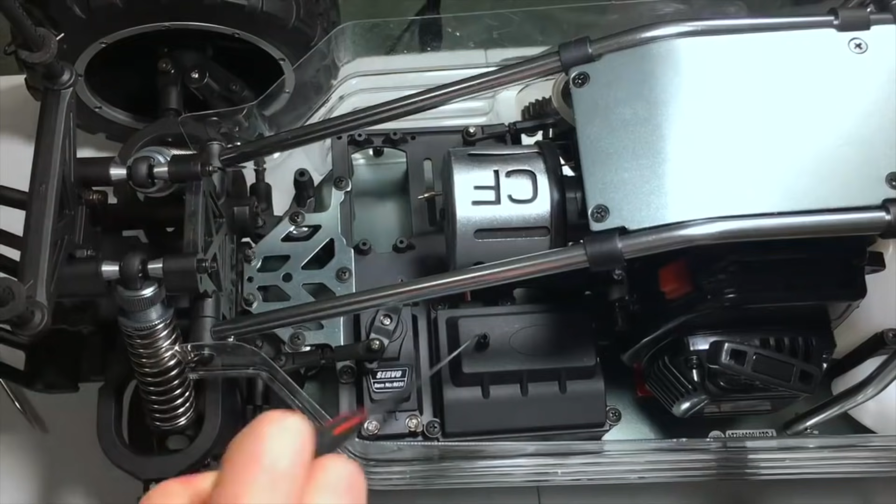Oh, they do fit. Interesting. Wow, so this thing comes with, I think, a 25 kilogram servo, and the brand is Servo. So you definitely know for a fact that you're getting a steering servo. I kind of like that. They're really sure of themselves, this company.

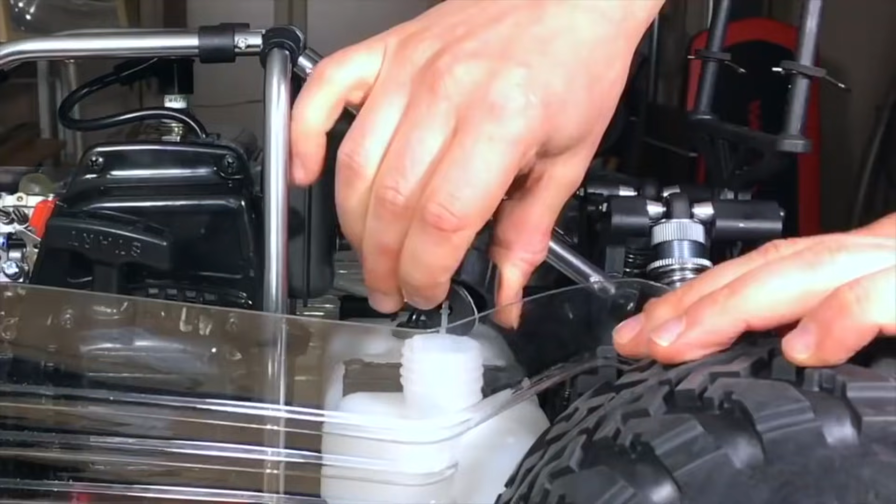It looks like a small piece has already kind of come out. The inside rubber grommet on the fuel cap, it looks like some kind of weird glue is already beginning to come off. You could see that right over here.

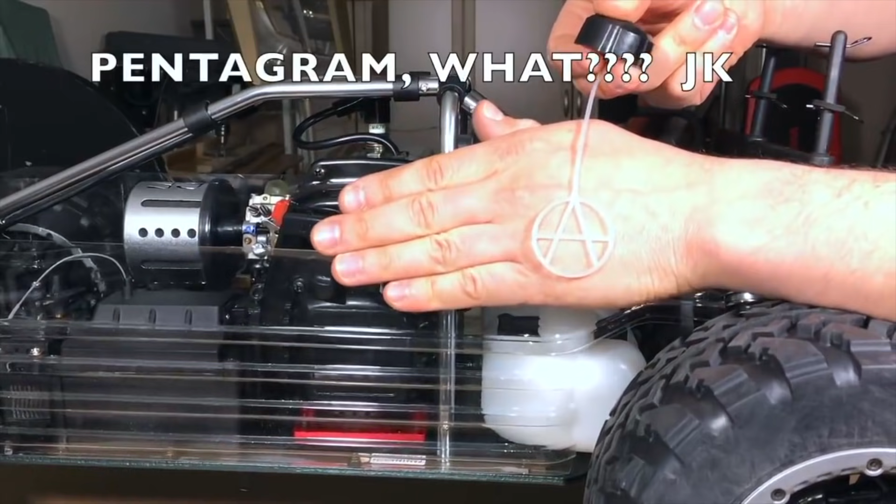So we'll do something about this later. It looks like there's some kind of stopper inside here, kind of like a lawnmower. Oh, here we go, that is weird. It's like a pentacle looking type of thing. I mean, was this thing designed by Satan, or maybe it was designed for Satan?

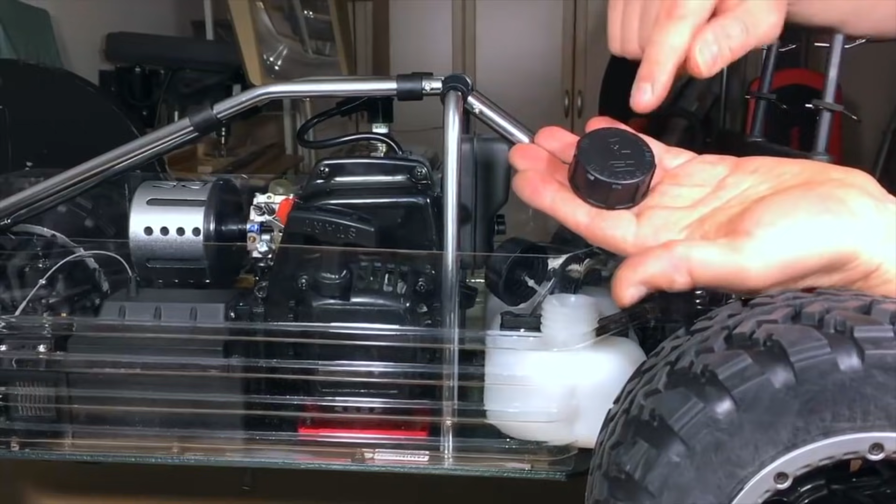I'm not sure, but I do know for a fact that I am not a Satanist. Okay, so here's a non-Satanist fuel cap. This is from my Red Cat. It's the same exact size as the one on a Rovan. Let's see if this actually fits. It looks like it's a much larger fuel cap.

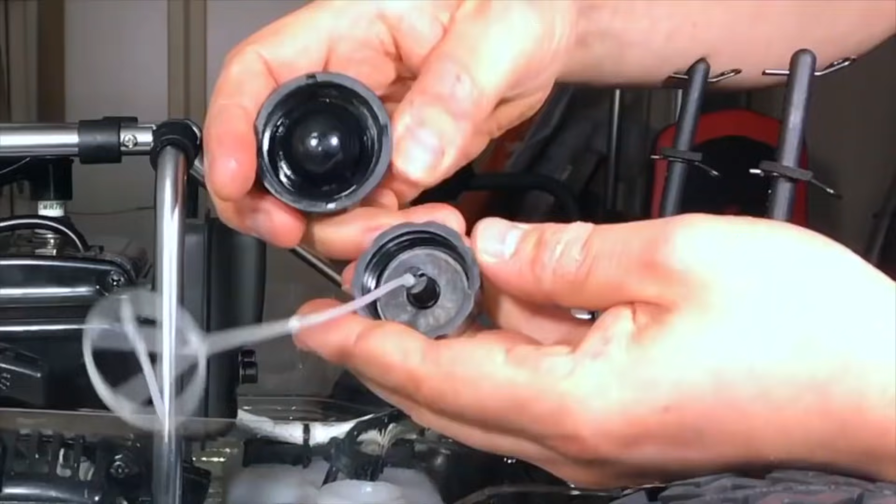Okay, yeah, nothing, it's a completely different size. So the threads here do not fit. That's pretty much a major disappointment. You could tell if you examine them up close. Other than this one belongs to the Church of Satan right over here, right? They're not the same size of fuel cap, so that's a disappointment in itself.

Blah, blah, blah, and then there's some more blah, right? There you go, I read the whole manual.

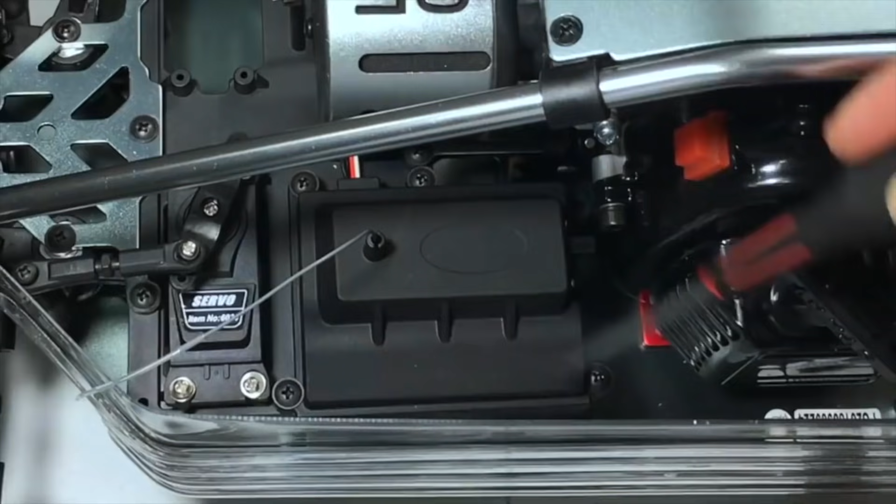Just like the Rampage, this thing has a receiver box that is already pissing me off. Notice all these screws inside here. So every time you want to charge a receiver battery pack, you're going to have to undo all these screws. I mean, honestly, that is very irritating. I don't know why they couldn't have just used the simple Tamiya style charging plug that's available on every single HPI Baja clone.

Another thing, look at this power on off switch. It is literally right by the hot engine. So every time you want to turn this thing on and off, man, look at that, it's right by the motor. Who thought of this design? It's weird, it's as if no one really ever used this receiver box. Why couldn't they have just mounted it here right on the other side? That would have been perfectly logical.

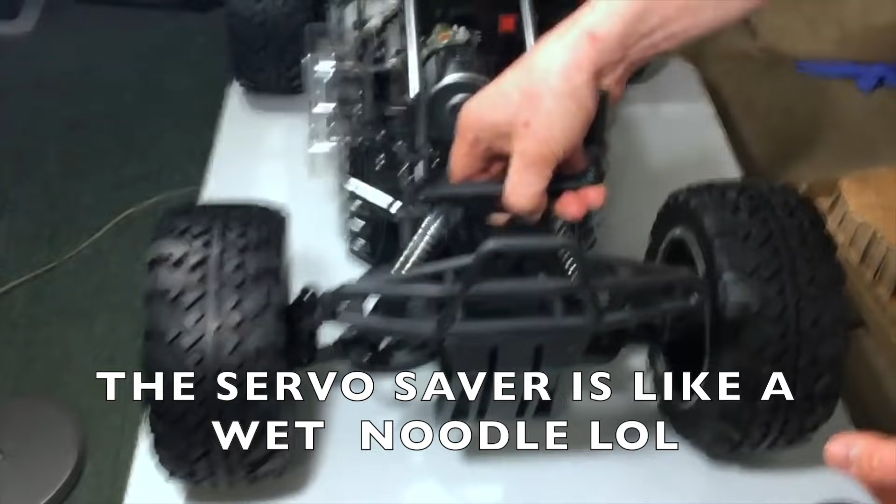Let's check out the servo strength. Oh my God, what the hell is that? That is the worst turning radius I have ever seen in my life.

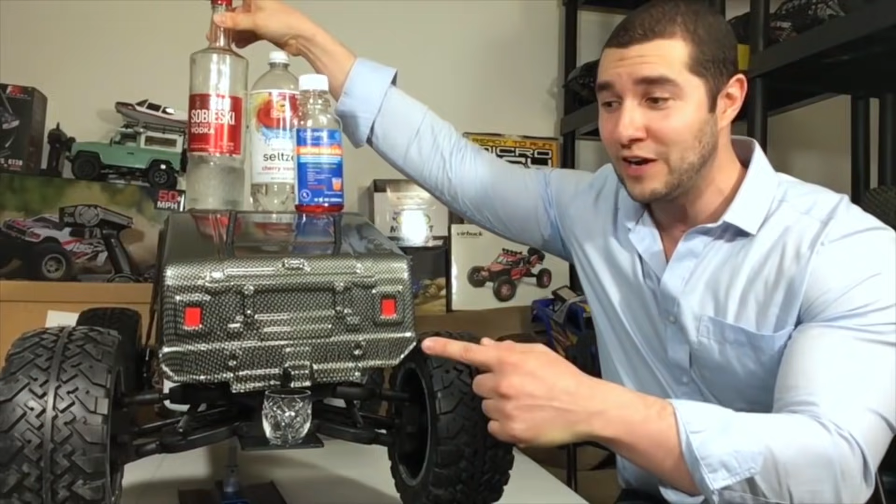Oh man, oh, you could always use your FS Hummer right over here as a bar. What am I going to be doing? I'm actually going to be using this cool ledge here in the back of the chassis. I joked around about this in the unboxing video, just how much it actually protrudes out of the back, that you could in fact stick a shot glass on it. And I'm doing just that.

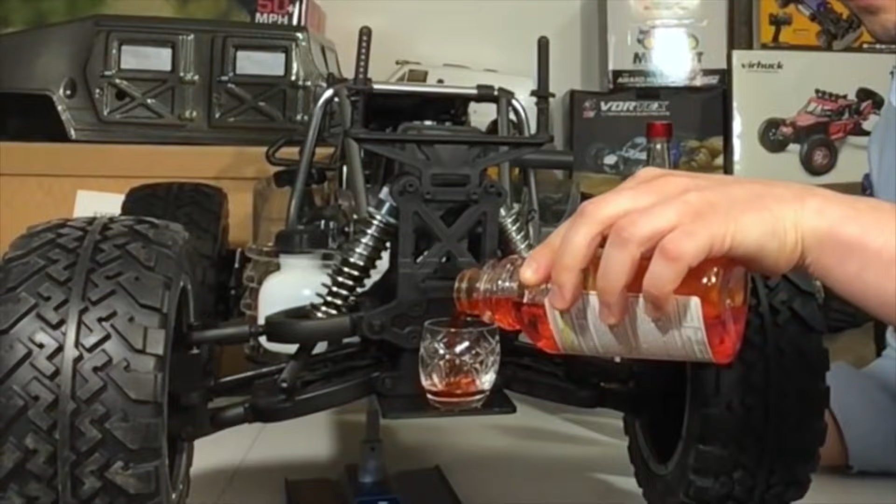Unfortunately, I did come down with a bit of a cold. Okay, the pouring station is prepared. Let's see this happen. Here we go, full serving of some nice cold and flu medication. Look at that, perfect bartender, guys. You don't even have to tip it.

Cold medicine tastes terrible. Let's move on to something better.

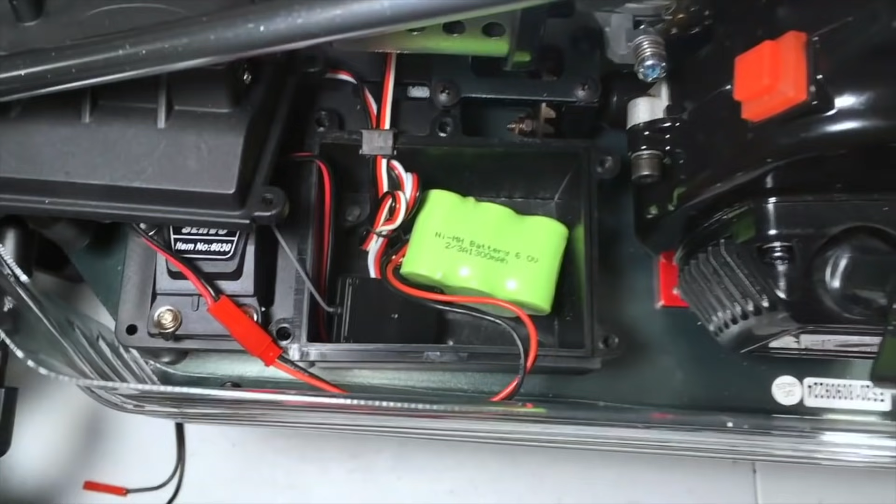Okay, we have the remote on. Let me show you once again how terrible the steering is. The receiver battery is all charged. Look at this guys, this is max steering. Oh my God, oh man, this is the worst I have ever seen. I've never seen such a small underpowered pack in a fifth scale RC.

But you know what, it does the job just fine. Obviously, you just basically got to charge this more. I probably will be putting in a larger 2500 milliamp hour capacity pack from a Red Cat in the future.

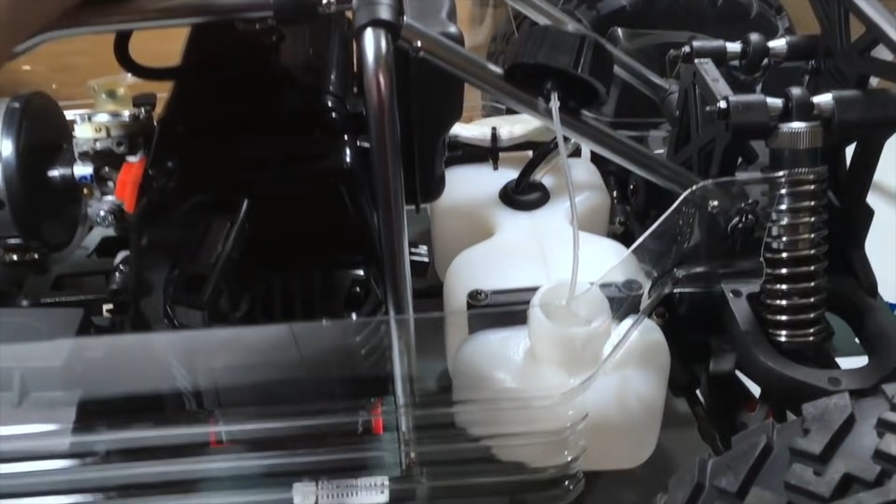Correct something I said about the fuel cap in the last video. Let me just take it out. I just wanted to make sure you guys all know that this is not a Satanist symbol, this is the anarchy symbol. So for all of you guys that corrected me, I'm really happy that you know. I'm not going to ask you how you know, but hey, FS Racing is into the anarchy.

So I wonder what it's going to run like. Hopefully it doesn't give me a nightmare.

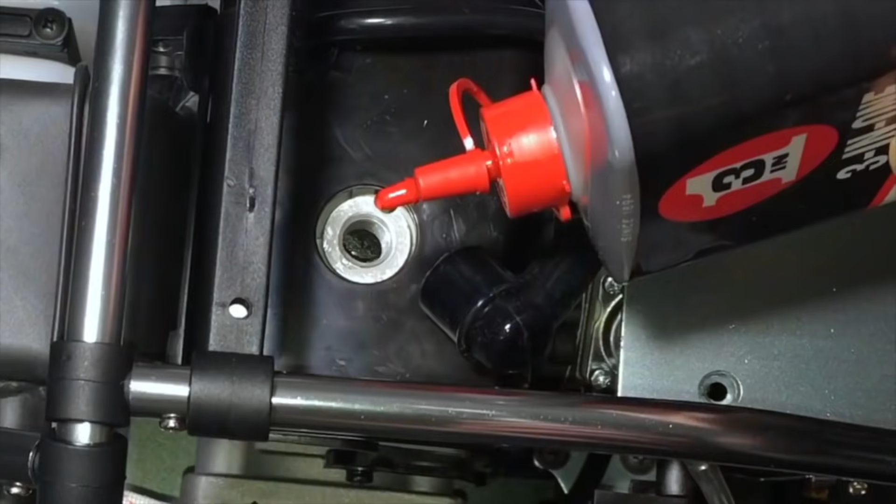Okay, let me spin the pull start a little bit. This is a good opportunity to test for a spark, so let's see if we could see anything coming out of here at the electrode on the bottom.

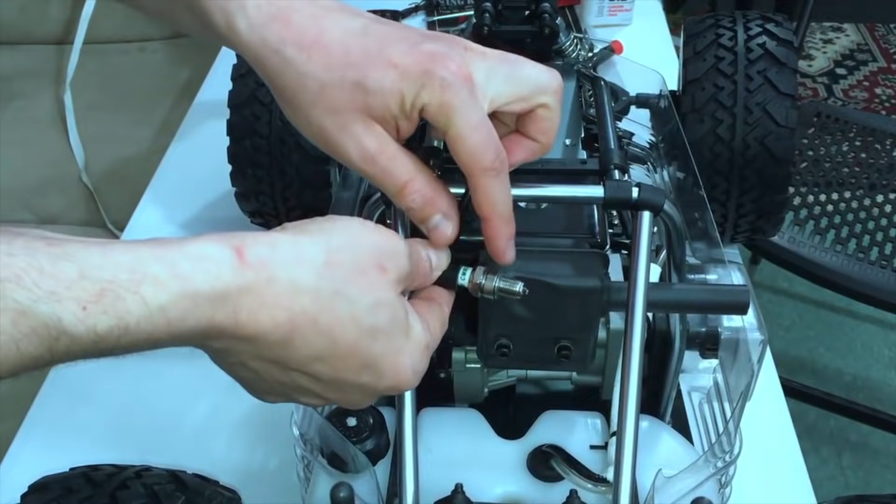Yep, we got spark, guys. I could see it.

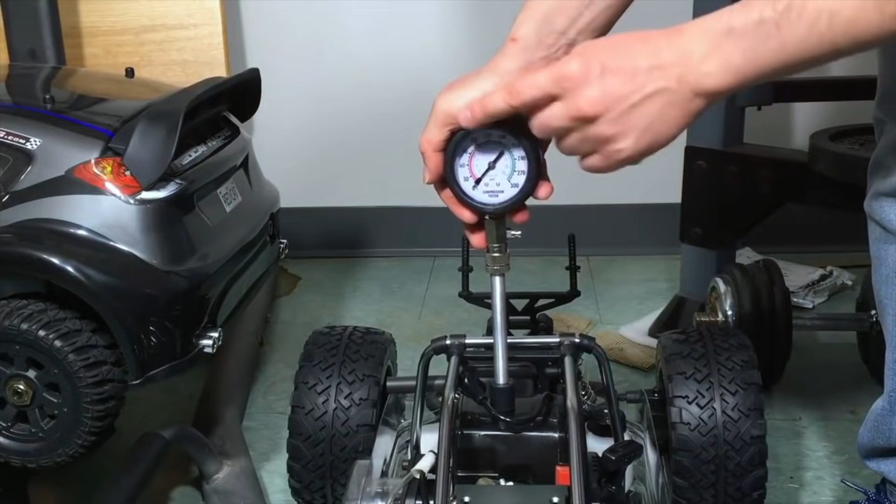Okay, time for a compression test on the Red Cat. I got 120, which is really high. Anything above 100 is good.

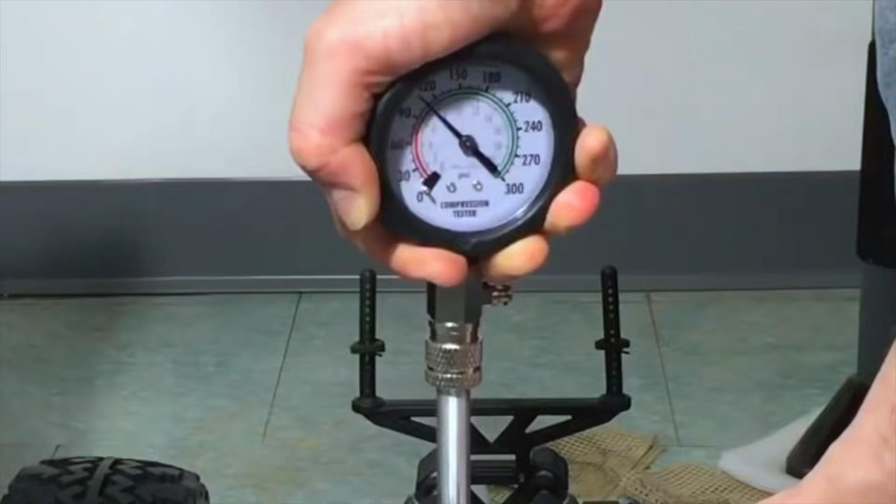Exactly the same, 120 psi. The Red Cat and this one are actually the same. I'm not surprised that the Red Cat and the FS Racing have the same 120 psi compression. In fact, these are probably the same exact motors.

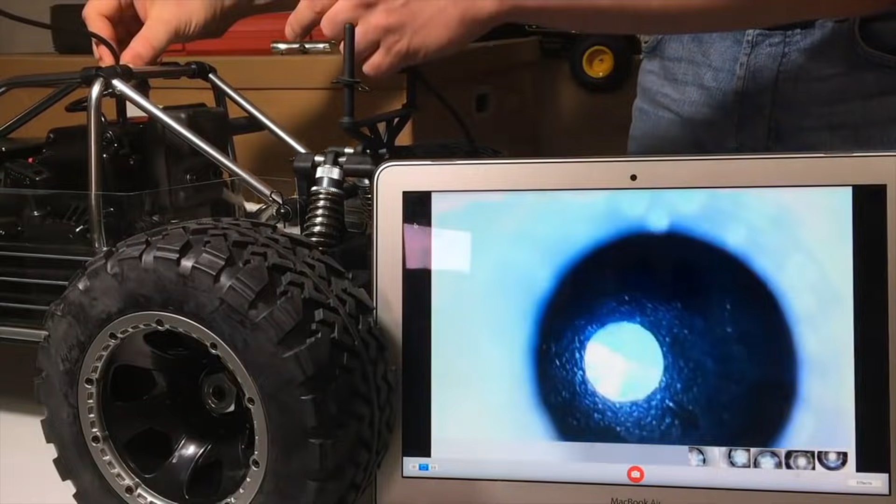Let's stick it down the spark plug hole and see what we see inside. Alright, looks nice in there. You see this little arrow right here on the computer? That's pointing towards the exhaust port, which is normal.

I've actually seen this arrow in my Rovan, so that's kind of nice. It looks pretty clean inside. Obviously it's a new engine, but over time we're going to check inside and see if there's any buildup from the actual castor oil I'm going to be using this time.

Let's cycle the pull start, see what it looks like. Here we go. Yep, not bad, as expected.

Here's a good size comparison of the FS Hummer. I have it right up against my Rovan and my Red Cat. Now clearly the Red Cat is bigger. It's actually bigger than the Rovan buggy, surprisingly enough.

I'm going to call this the unnatural gas Hummer.

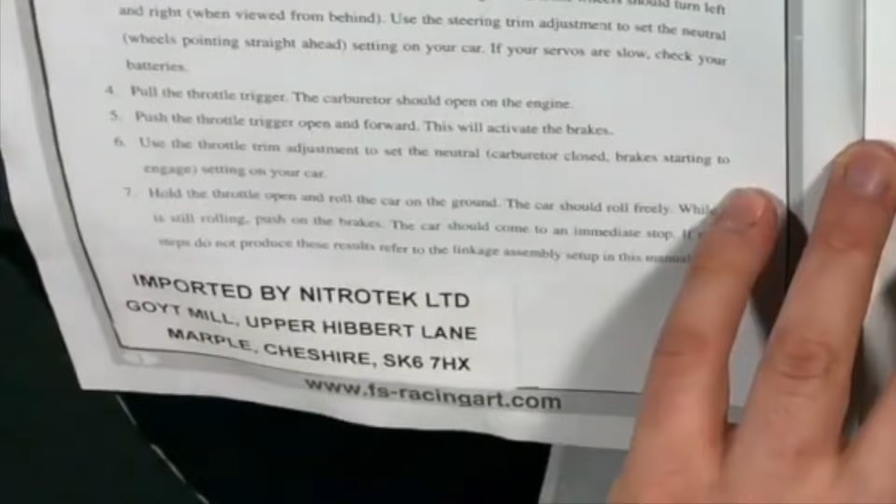Let's open up the manual and see what they have to say. I'm sure there's going to be a lot of interesting things. Imported by Nitrotek Limited, which is normal, from Cheshire. There you go, shout out to all my Britain fans.

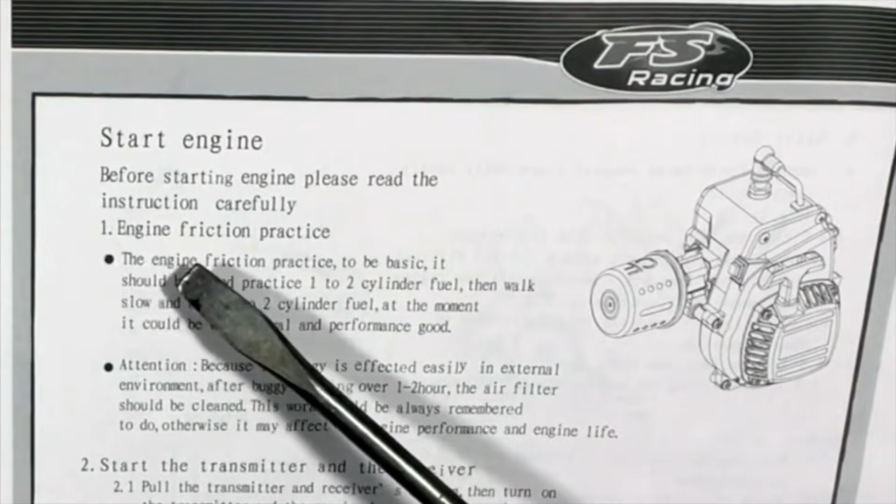Let's first look at the start engine section right here. Before starting engine, please read the instructions carefully. One, engine friction practice - I think they mean break-in. Let me read this bullet.

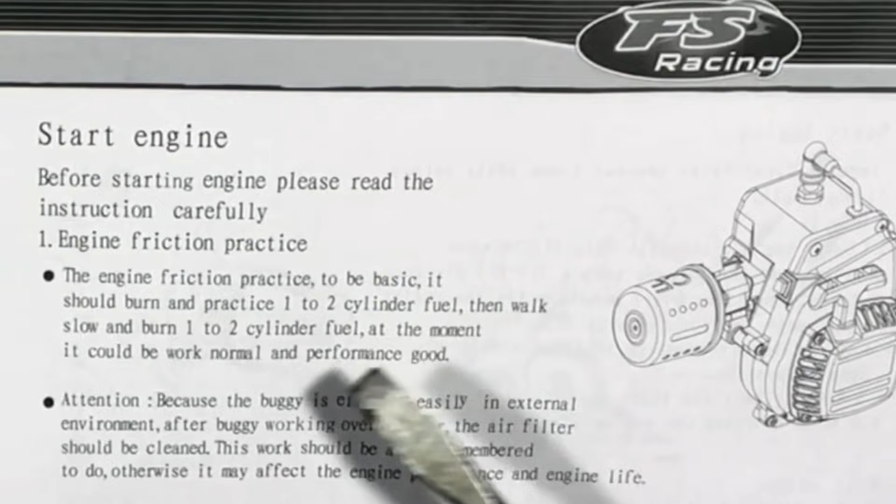The engine friction practice, to be basic, it should burn and practice 1 to 2 cylinder fuel, then walk slow and burn 1 to 2 cylinder fuel. At the moment, it could work normal and perform good.

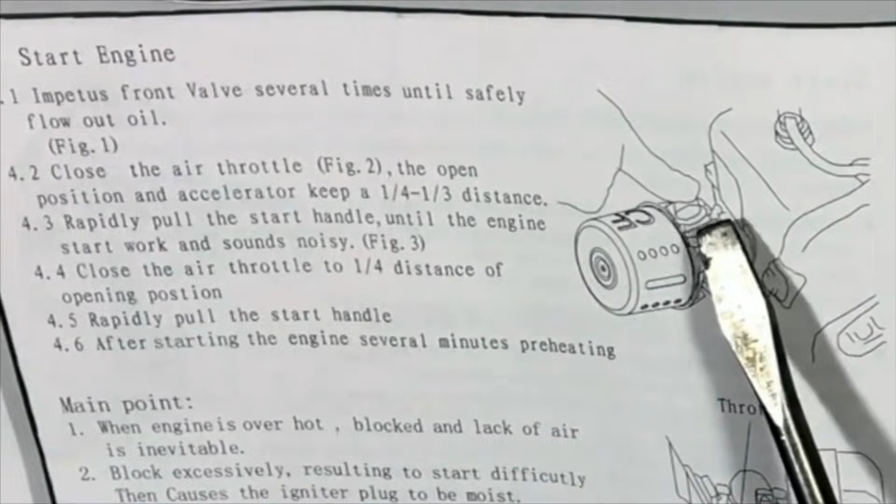Right, I do not even know what this is. It says impetus front valve several times until safely flow out oil. They're definitely saying to prime the primer bulb until you see fuel inside, which is normal. Close the air throttle - I think they're talking about the choke.

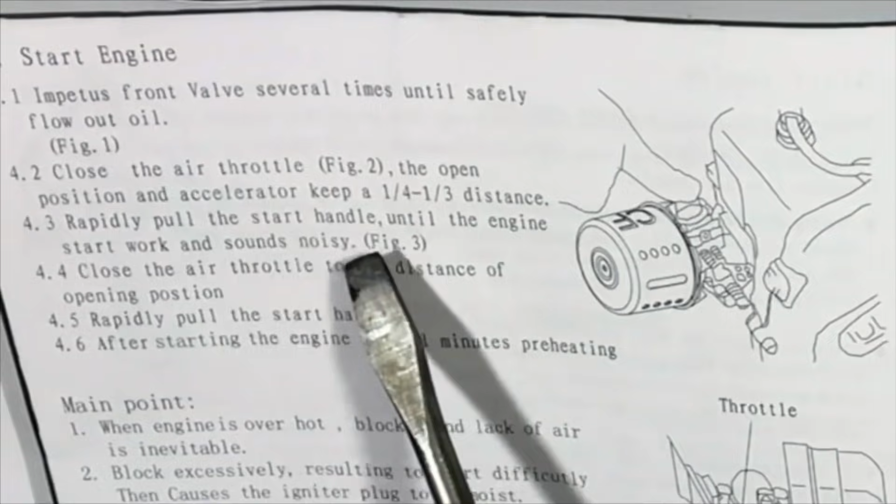I normally don't use that. Blah blah blah, rapidly pull the start handle until the engine starts and sounds noisy. Okay guys, so when it sounds noisy, you're good.

I don't particularly like the design of this fuel tank. Notice what I have to do to get this spout in here. It's basically flat, not an angled design like every other RC I've seen. Usually the gas cap is on an angle that makes it very easy to pour. I already spilled some right over there - gotta go clean it up.

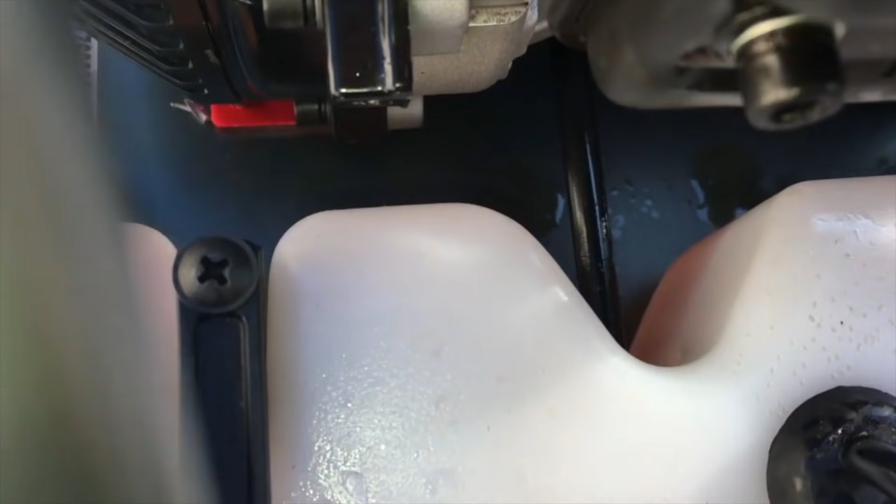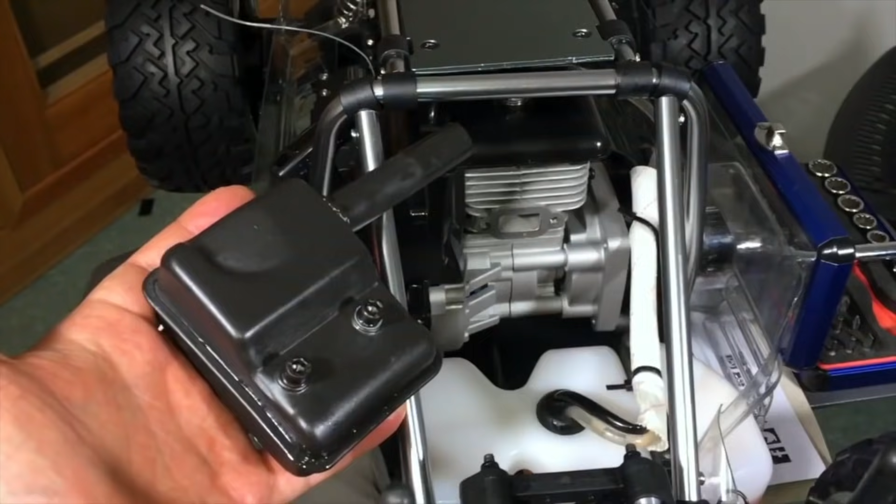There's a large drop of oil here and one a little bit to the left of the center drive shaft. Now it looks like it's just oil coming from the actual can exhaust. To investigate the issue a little bit further, I took this thing inside and I removed the can exhaust.

Everything looks to be okay. I cleaned up the oil on the bottom of the chassis. Right now I'm gonna go outside and do another heat cycle.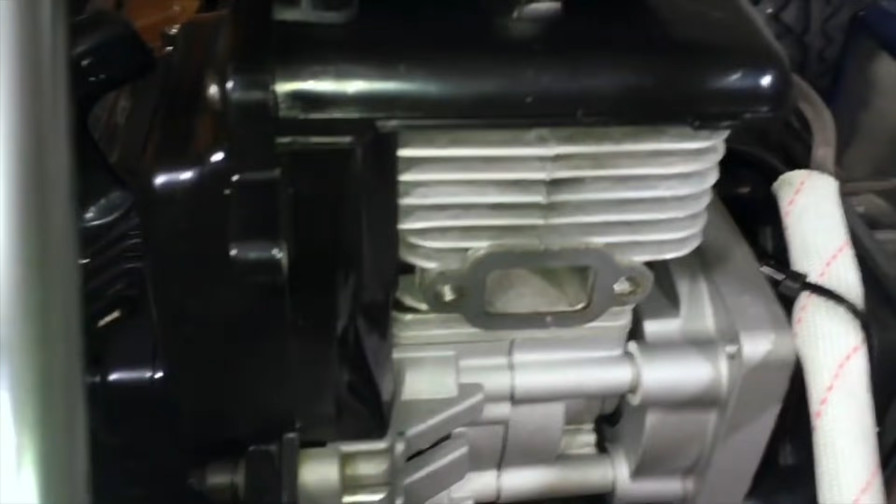The only thing I think it could possibly be is this exhaust gasket. It is extremely cheap and thin looking. Now I know I put down the Redcat exhaust gaskets before, but hey, they definitely do not leak.

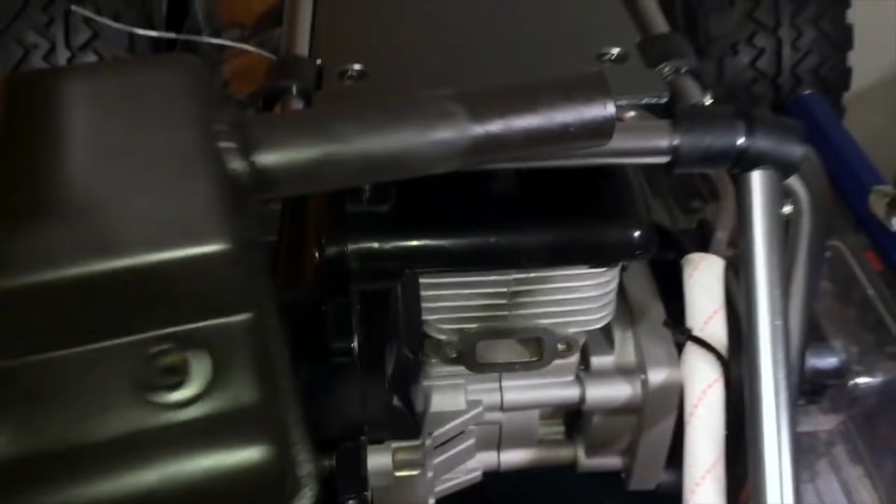I'm going to call this the unnatural gas Hummer. What can I say? You gotta get your RCs gifts as well.

They're not only gifts for us to have fun with, but hey, you gotta make sure that they're in a good mood so they don't piss you off in the future.

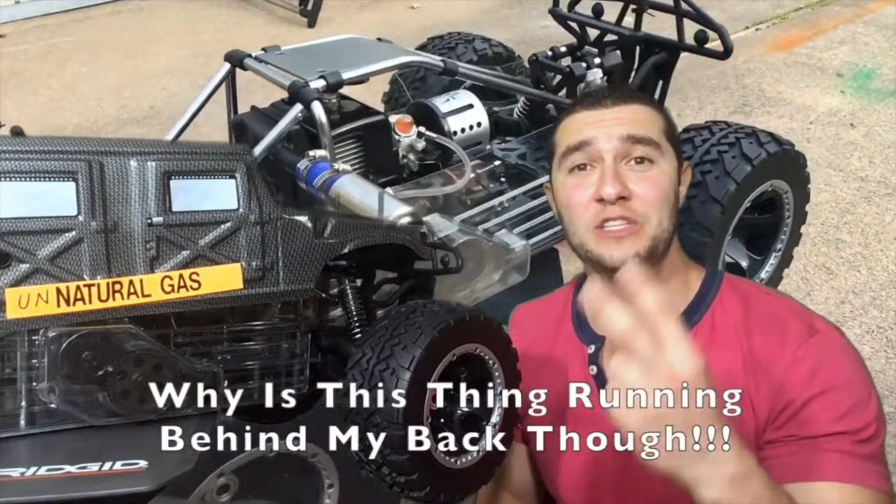It's just one of those days where you don't want to... Did you see all those problems I had with this? Just a bunch of weird stuff, but that's not it. Today was actually the first time I ran this in quite some time. So let's go to the RC track. I had someone else record me running it. I wasn't even really prepared to drive it because this thing is just such a piece of...

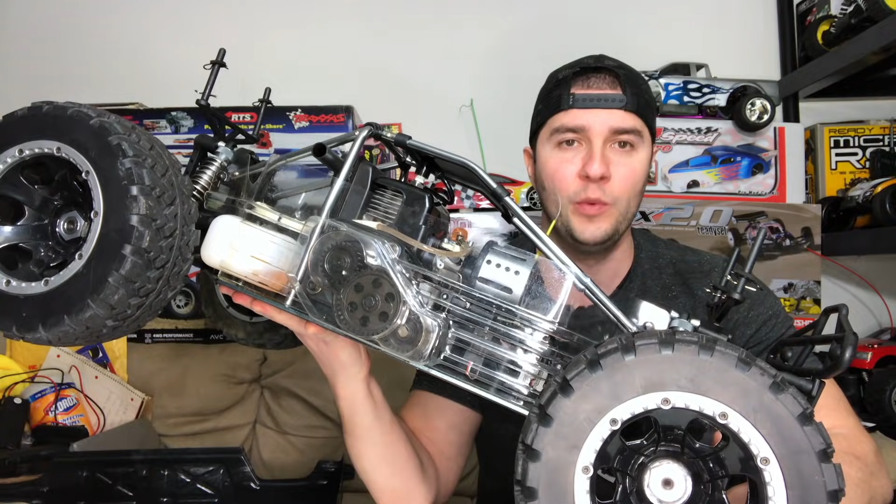Now, unfortunately, I did not record the worst part, there was a whole bunch of smoke coming off of the entire clutch bell area over here. I checked it, nothing seemed to have been on fire, there's no oil here, I cleaned this up fairly well. I'm a little scared the clutch itself has worn. I only drove this for maybe a couple minutes, guys, and this thing was not having it. Thank God it's only a two-wheel drive chassis, although it might look like four-wheel drive. It's not, it's in fact only a two-wheel drive. This brand does sell a conversion kit where you can install a drive shaft in the front here, and you do have a grommet in the front where the diff normally is situated.

But guys, that's it. I really didn't even want to do a whole video on this truck. That's why I just clipped together a couple of my old clips from long ago, because I had so much extra material. I don't think this thing deserved any extra work. But don't worry, I'm still gonna run this thing. You wanna know why? Because this is still a real internal combustion gas engine. It still runs rich, it still runs loud, and it's still way more fun than most electrics that money can buy. See you later.